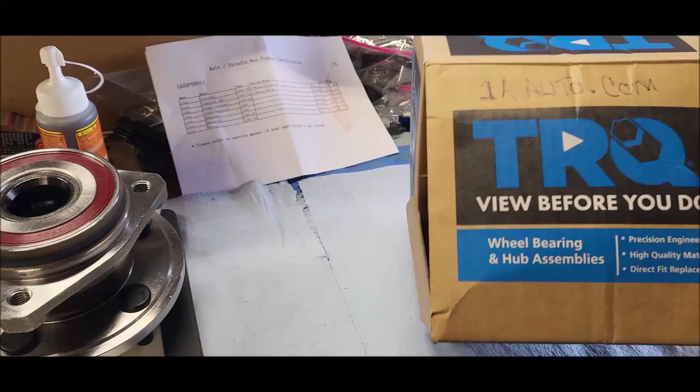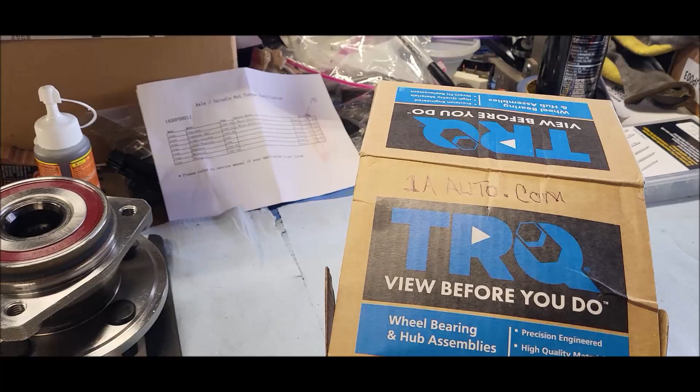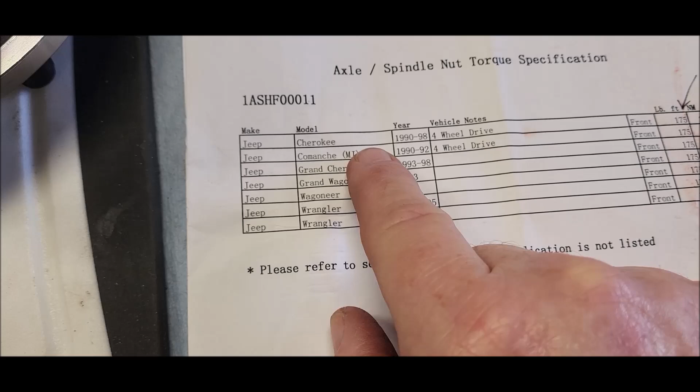Comes with a little sheet and has your model on there. Actually, the axle nut is 175 foot-pounds for any of the Jeeps listed on here.

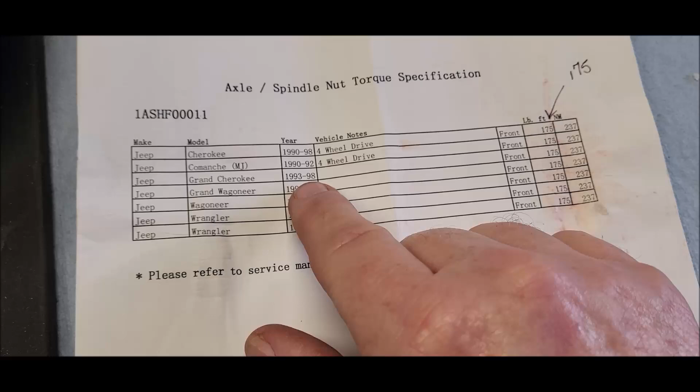So what we're going to do, I went ahead and blocked the back tires because we're on a little bit of a hill. We're going to go ahead and loosen up the lug nuts, the axle nut, and then we're going to jack it up, put it on stands, and then finish the tires off. And we'll start over here and replace this one. And it's a little rainy out, but it's not going to slow us down.

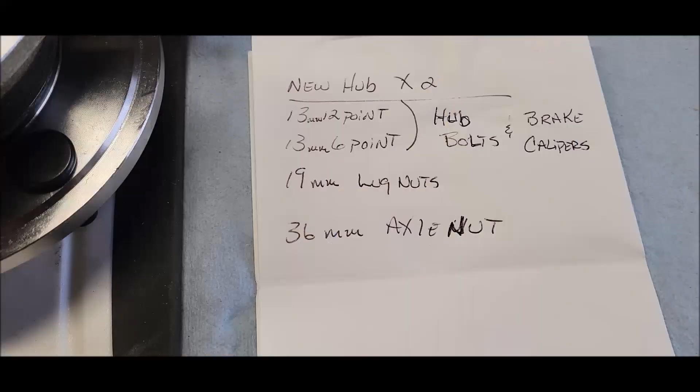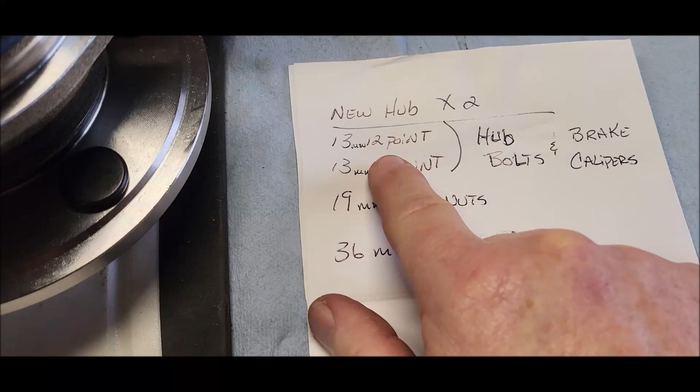Hey, real quick, here's the sockets you're going to need. You're going to need a 13 millimeter 12 point. There's a bolt on the back that requires a 12 point. And the rest of them could be 6 point, 13 millimeter. That's going to be your hub bolts and caliper. Not knowing which one that is, I can't remember. It's been a while.

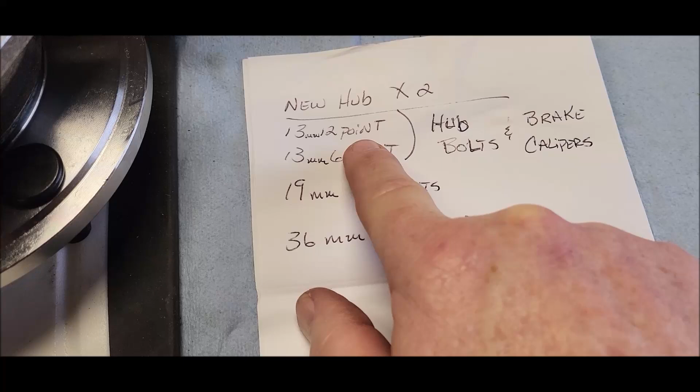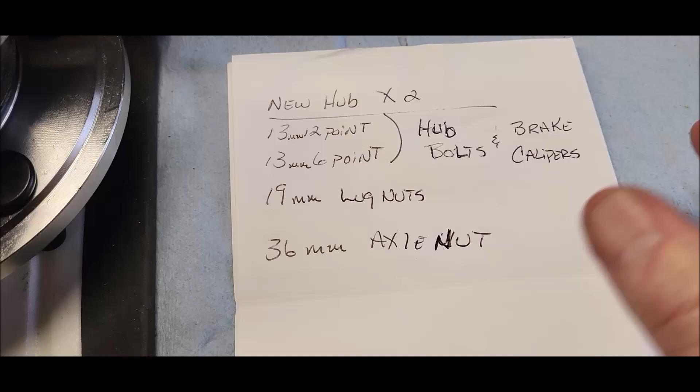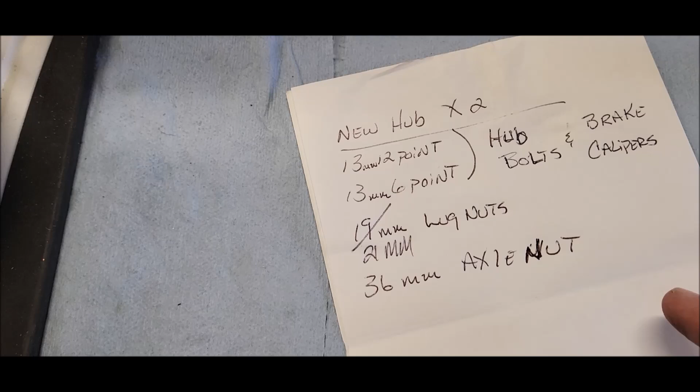And then you got your lug nuts, which are 19 millimeter. And the axle nut is 36 millimeter. So just a heads up. I just checked the lug nuts, and it's actually 21 millimeter for your lug nuts on your wheels. Or actually on mine. I don't know about yours, but mine's 21 millimeters.

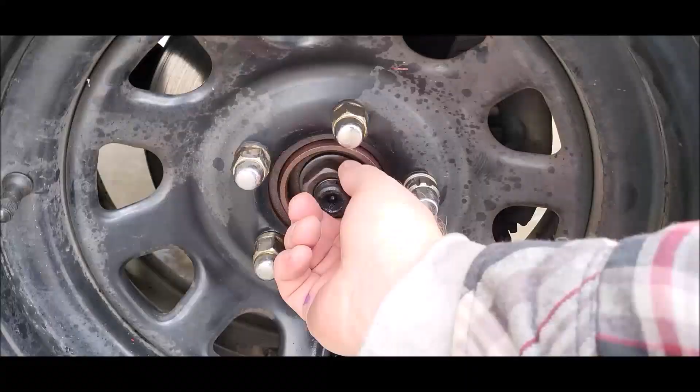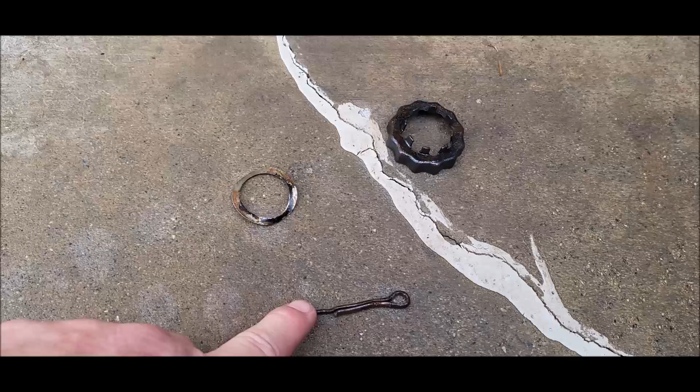Came up real easy. It's not off. I just loosened it up, and these are all loose. I don't know what this is called, but I only have one set to replace this. So the other side, I got to keep this, and replace this. You never reuse the cotter pin. Always use new.

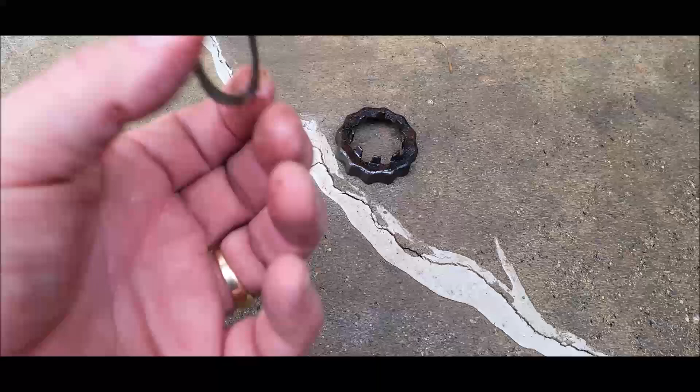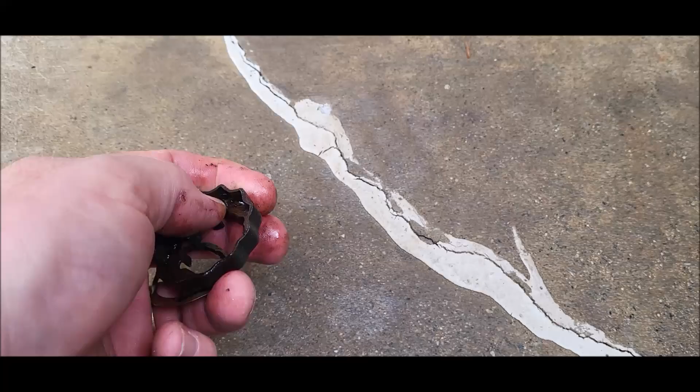All right. So we're gonna get rid of that. But you have this. It's like a spring tensioner, whatever. It goes underneath this, over the nut. So we'll clean this up and then reuse it on the other side. So right now we're going to jack it up and put it on stands.

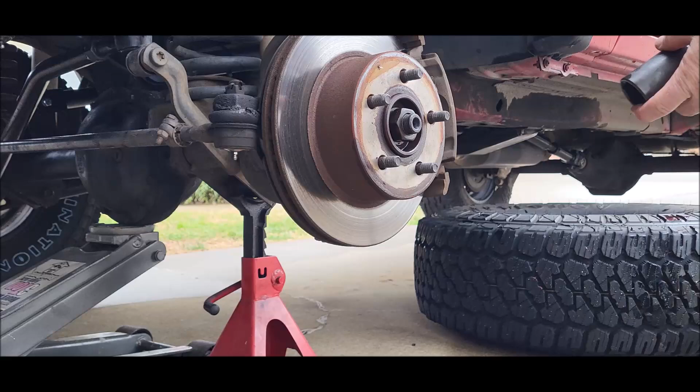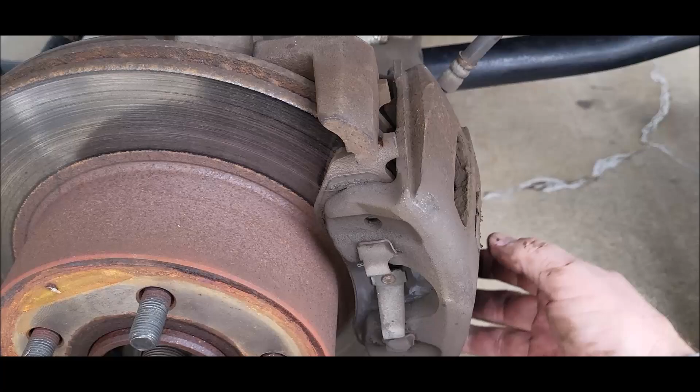All right, next we got to take out the brake caliper. There should be 2 bolts on the back. And then we'll be able to pop it up. We'll have to get a little screwdriver, pry bar, prop it up. And then I got a hanger hanging here to keep it out of the way.

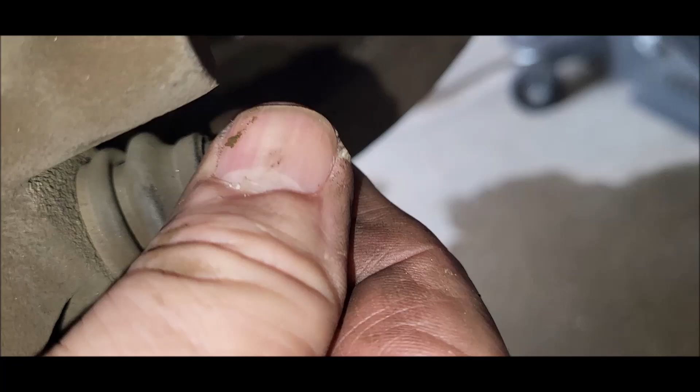Now, I thought they were 13 on the back side, but actually this top one is 12. And then this one down here is 13. Weird. But we can work with weird. So let me take that off and be right back.

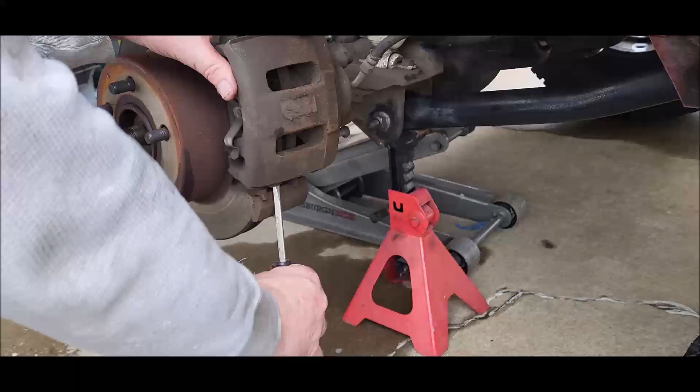All right, your rotor, you don't want to touch right here. And when you take it off, make sure you put it on a surface so this is touching the surface. You don't want anything touching the rotor. Like I got my fingerprint right there.

This would be a good time to inspect your brakes. My brakes look good, the rotor looks good. Now, your ball joints, you can go ahead and grease those. Now remember we took the big nut off, there's a washer in here. If I can get this magnet in there.

There we go. One washer. Using the 12-point 13 millimeter, go ahead and loosen the 3 bolts in the back. You're not going to see all of them, but there's one right there.

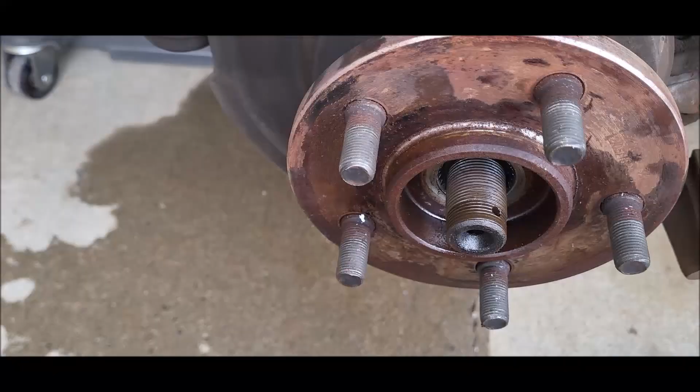Hey, one thing real quick. This is the end of the bolt that holds on the hub. You can take something to scrape all that gunk off, because as soon as you start unscrewing this, all that stuff's going inside. And it might be easier to clean it off and then come out a little easier. A lot of grease, grime. You get the point.

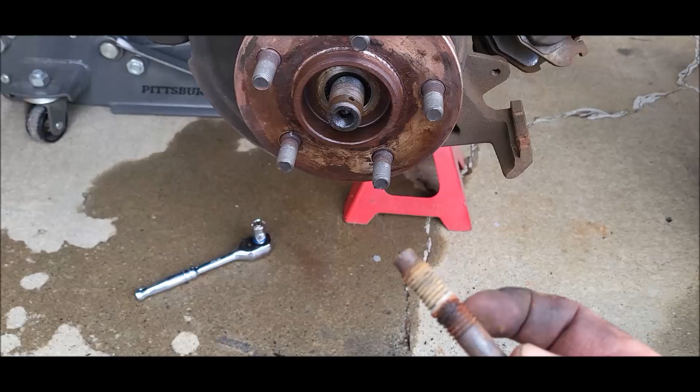Here are the bolts. This one's pretty rusty right here. When I put the other bolt, I bought new bolts. I'm gonna go ahead and use those. I'm gonna put anti-seize on there. This one's pretty rusted out. Focus, there it is. The other one's not bad, but I'm gonna go put anti-seize on there.

So there's the hub we have to remove. Nothing holding it in, but small hammer. We'll take care of that. I seen a couple guys do it. They knock the front right here just to loosen the splines from the hub, I guess. And they're removed. And now the hub should come right off.

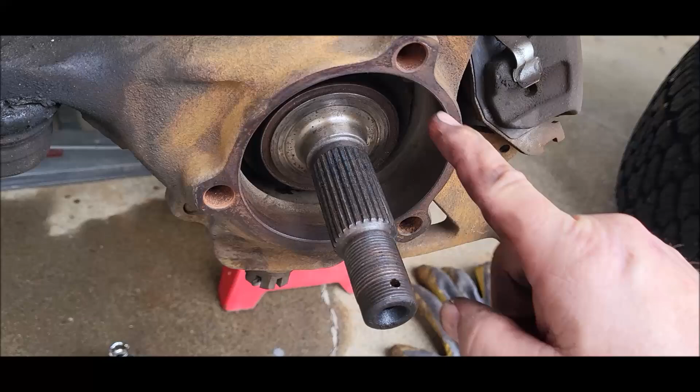Okay, I cleaned everything up, especially around here, because the new hub is going to slide in right here, all the way around. Not all the way in. It's just going to take up about right where my finger is. So I'm going to put anti-seize in there, and on the splines on the shaft.

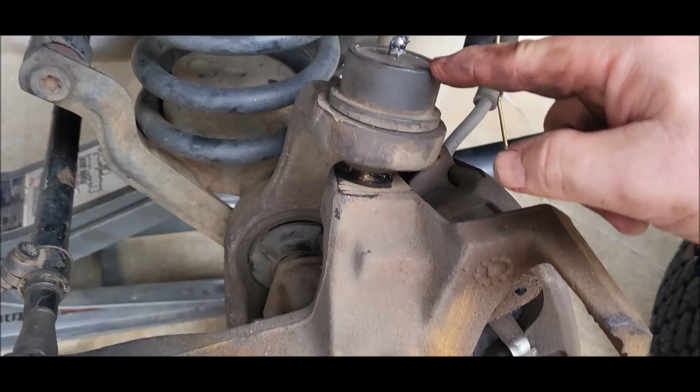I went ahead and greased up the ball joint, and the knuckle isn't moving at all, so I was really tugging on it. And then we're going to go ahead and grease up all the little points the brake caliper touches, to cut down on the squeaking. And the brake pads are good and the rotor's good, so we'll go ahead and put everything back together.

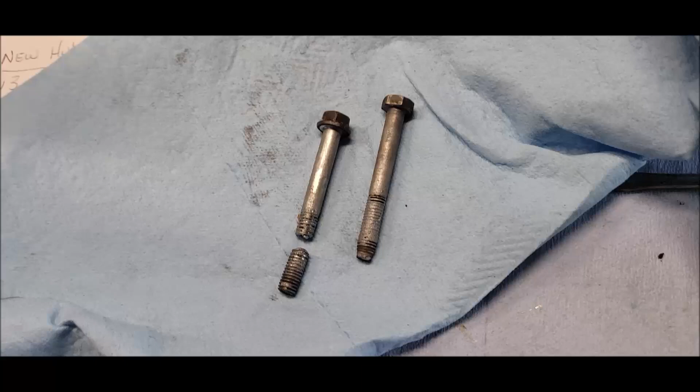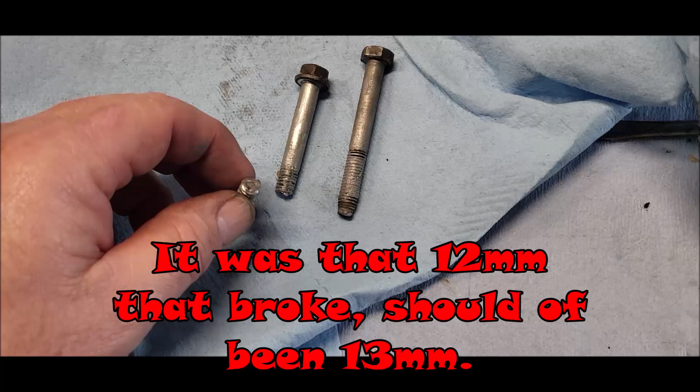But AutoZone has a set for me. They're holding it. So when my wife gets home, Mrs. Alien, I'm going to go get it and finish up. Anyways, the cool thing is I can go ahead and do the other side. So I'm going to finish up the other side, and then when I get the other bolts, I'll finish up this video.

All right, we're at the point on the other side where the other bolt broke. Okay, up to this point, we got the hub on. The hub bolts on the back are torqued down to 75 foot-pounds. Caliper bolts are supposed to be 20 foot-pounds, but I just tightened them down really snug.

All the points where it might squeak on the caliper and the brake and everything, I went ahead and put grease so we won't have that squeaky thing. I went ahead and greased the ball joints because it's there and it's easy to access, and they didn't take that much.

So the first thing we're going to put on is this big washer. It kind of has a flat side, so the flat side's going to go in this way. The bevel side is pointing out. Stick that on. Same with the nut. There's a flat side, and then there's a side that has a bevel. You can see it right there.

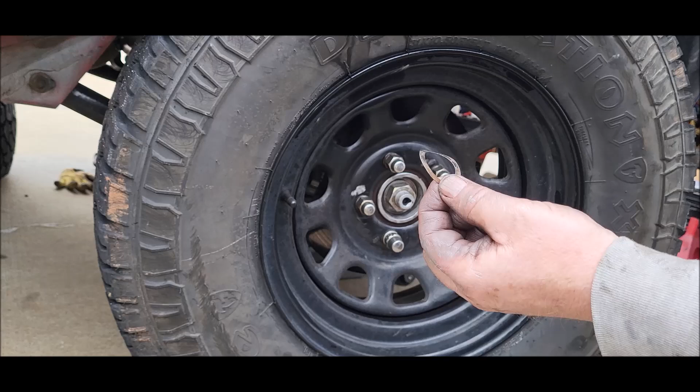Now we're going to put this on. Now remember, this is the old one. This kit that I bought does not come with this, so you got to retain this and use it. All it does is fit over it. Put this over it. Make sure you line it up so you can put your cotter pin there.

Slide it in. Turn it sideways, and then split it. One side goes that way and the other side goes the other way. There you go.

All right, that is complete. Well, this side. The other side is not. Got to wait on that one bolt.